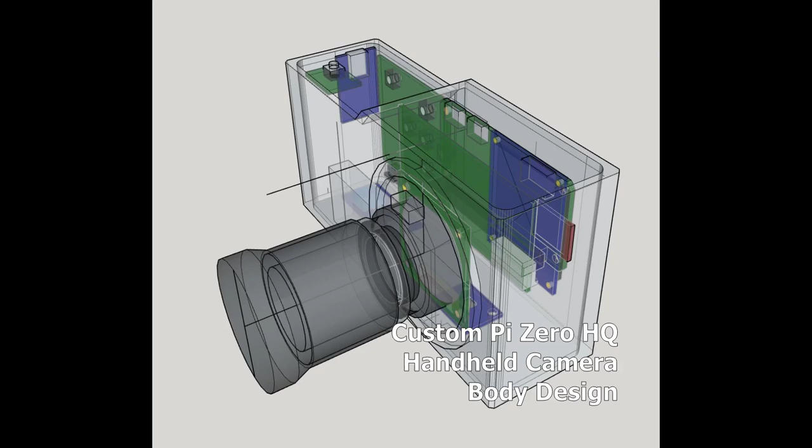Okay, so here I'm designing the body. I admit it's not anything amazing. I wanted the lens to be on the right side. Kind of a neat design.

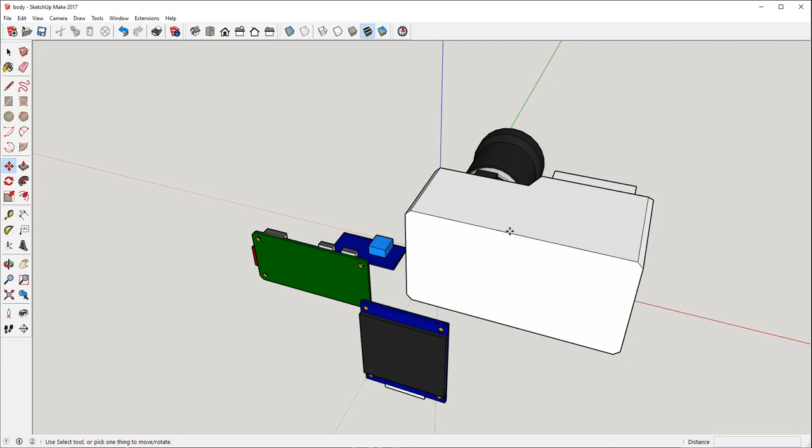The main dimensions are like spacing for the boards. This will be in there, it'll be underneath. Cut a line across here for the two halves. The battery pack is in the front here. I should group these together.

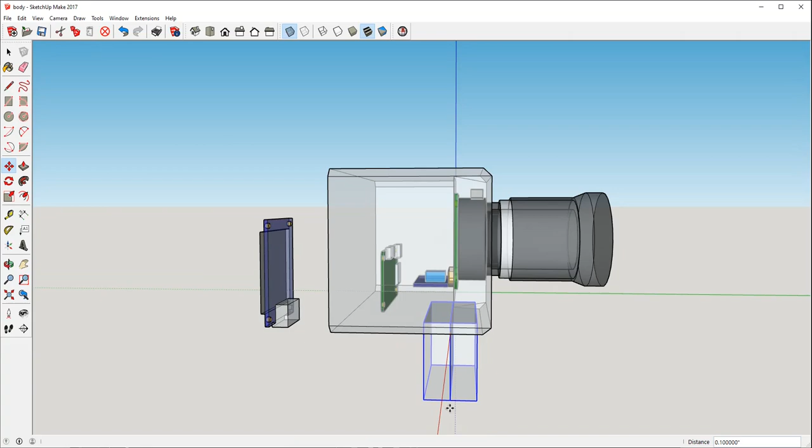The body will have a wall thickness too, so that's something to keep in mind. So something like that.

Then I gave it a lot of floor space because this guy here will be underneath. But not only that, it'll be over here because the IMU, which I don't have a model for right here, I have one somewhere from other projects, or I can make one. It'll be

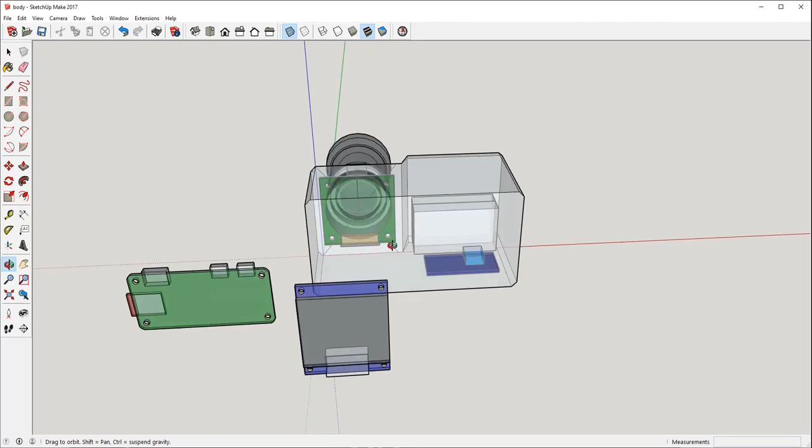mounted on the floor. Ideally it would be like in line with the camera, but there's no real need to, like it's parallel, you know. So it'll just be mounted to the ground, flat with the body.

And then the D-pad and the back button will be here, and then somewhere over here will be the shutter, which is a nasty design, but I'll probably put it near the front so it's like somewhere that you know where it is without looking.

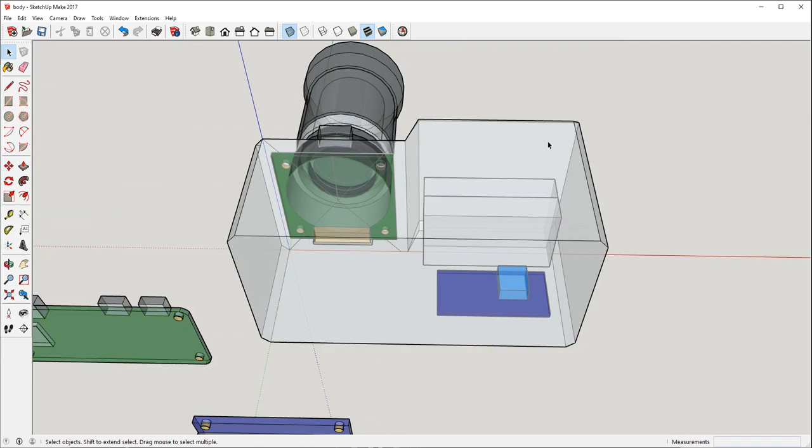And yeah, I mean, it's a pretty simple project, but it's still cool to like design and make something yourself, especially like hardware. So yeah,

I still have to wire everything together, but I'm trying to make sure I have room, and then I'll verify the components. Like the shutter with its own board, it needs like 2 screws at least to screw it upwards into the case to make sure when you push down on it, it doesn't pop out.

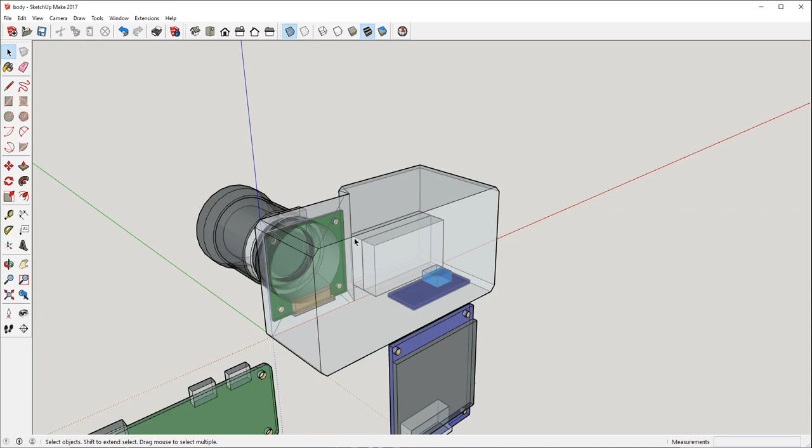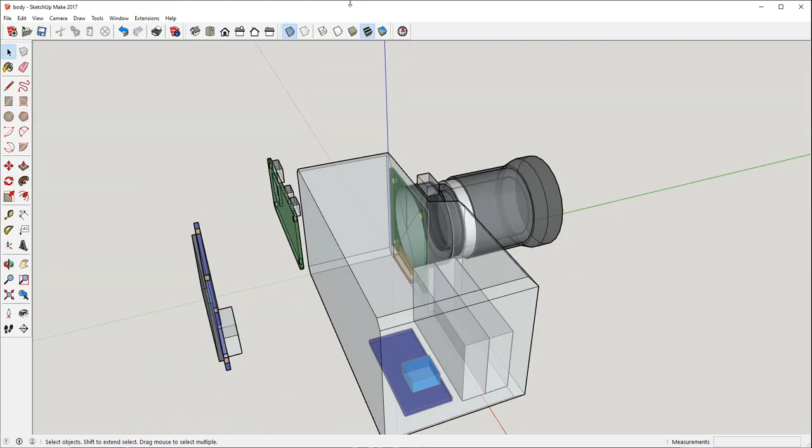Yeah, so I'll just keep going. And I did try to round out the edges, like this is still sharp. You can use some like follow me and do all the, but yeah, this'll work.

And I think your hand will wrap around this part more than the back, so the back is just flush. Maybe I should round this part at least. And then your finger, like pointer finger, will be here and thumb will be at the bottom. I think that's how you would hold this thing.

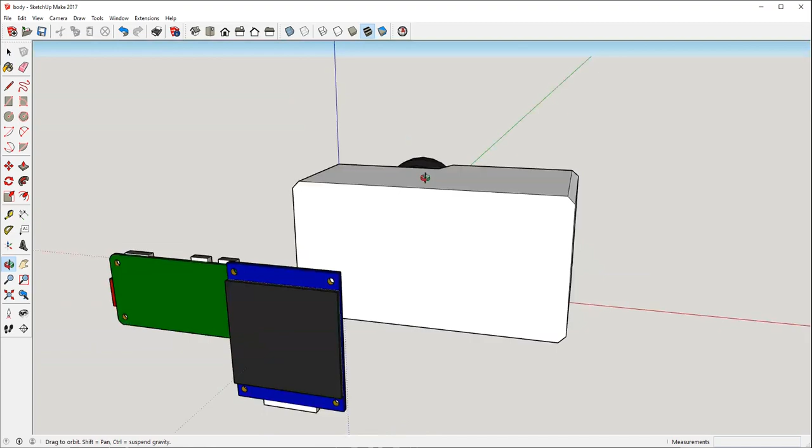And I'll just cut like vent holes so it has a way to get rid of heat. Although the holes for the ports will provide some ventilation too. It's not like it'll get really hot, but you know, it does produce heat.

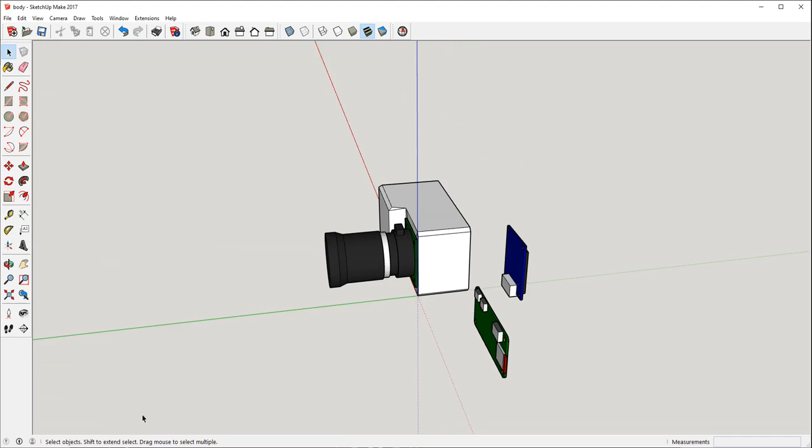Alright, so I've got everything soldered at this point. I'm just doing some designing. Previously I showed how this ring would be it would have like notches in there.

God, every time I record, man, my throat. I just drank some coffee. Alright, throat has been cleared.

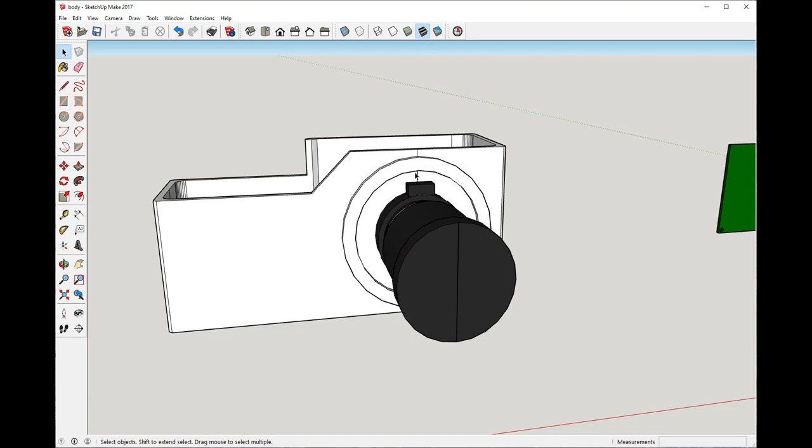Yeah, so this ring is just clearing this notch here that's in the HQ camera. It's 0.1 inch wide, no real reason, just enough room.

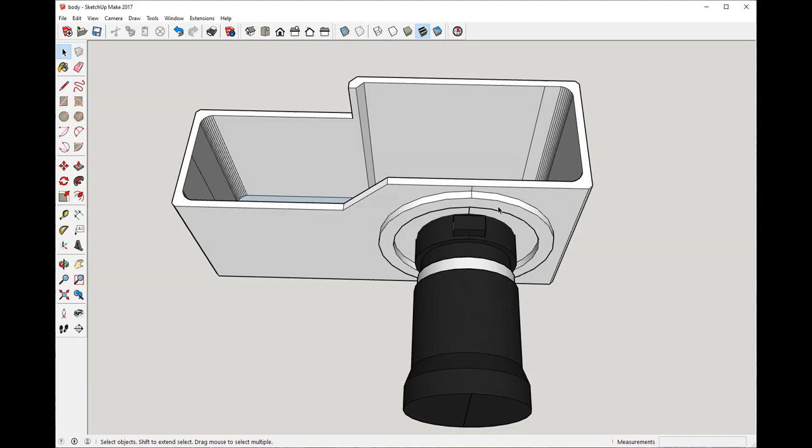And then there will be the rotating rings that are attached to each lens. Unfortunately, each lens is different, so they'll have to be designed custom. And then they will sit against that and rub against it, so it's harder to spin. And then the those screw things will be taken out, the threaded ones that are in the lens, and then it'll just use compression by the ring clamp with a screw, just like how this thing works here.

But yeah, I'm not liking this design, man. The reason I'm cutting it down is the electronics fit inside of 2-inch height, so the rest is just extra material.

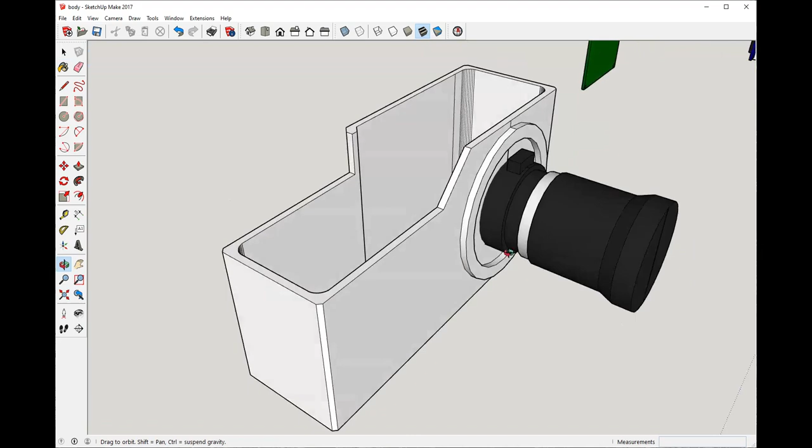But you know, it could be cool where like the emphasis on the large lens, it's like the NEX 5N, where it's like, it has like this giant lens and then a tiny body. But yeah, this cut though I think is like too much. I have to go up a little, or I don't know.

I just don't want to like commit to a design and hate it. I could always reprint it, but like it's such a pain to like get everything in there, screw it down, attach it, you know. And honestly, I probably won't use this camera that much.

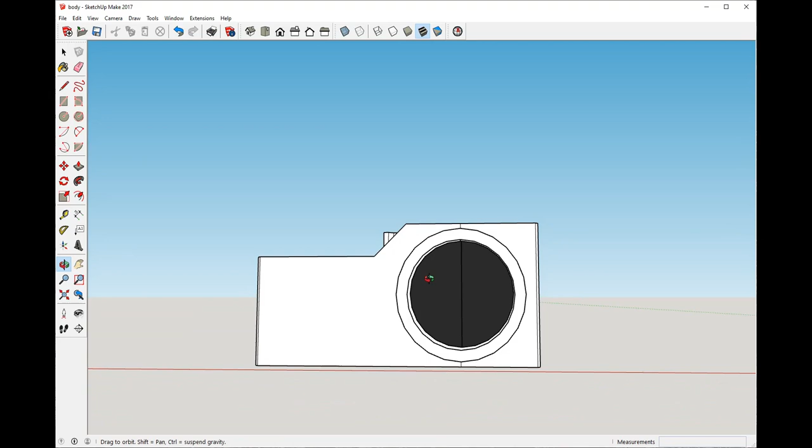Maybe I will, because I had to sell like every camera I own. I don't even have a lens for my A7 II right now. I had the kit, but it's like I always end up returning that. I've bought it twice before.

Anyway, yeah, I guess you could like round it. That could be something. Match the concentricity of this. Concentricity. There you go.

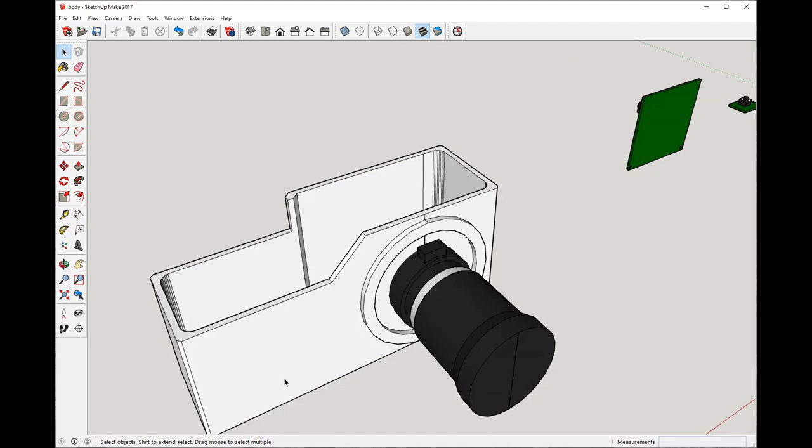But then it makes it a little harder to print, but you'll probably, yeah, if you cut it down, you'll print it like face down with the plate, which means it'll have to print supports for under here. That'll be ugly. The surface won't look good, but it's black, so it'll just blend in.

Yeah, so that's where I'm at right now, and then I gotta put everything in. It's all based on alignment pretty much. Like the left edge here, the electronics will go in there. I'll have to cut out ports so that all these things are still accessible.

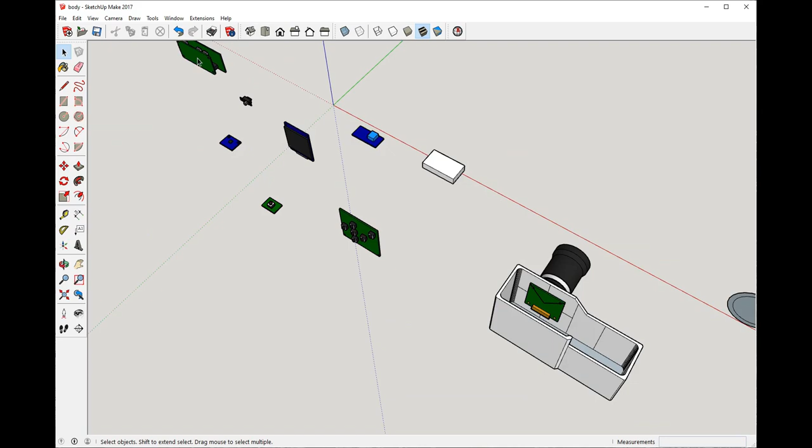And then D-pad and all that, cut holes, screw points for the OLED, vent holes, screws for the camera board, cut it in half, design like an upper, lower, inner, outer sliding thing with those channels that have the screw hole in it, so that's how it screws together.

And then yeah, I'll have a camera, and I can do programming after that. Unfortunately, I don't think I'll finish printing this today. It'll probably be sometime tomorrow. But I don't have to reprint anything, redesign.

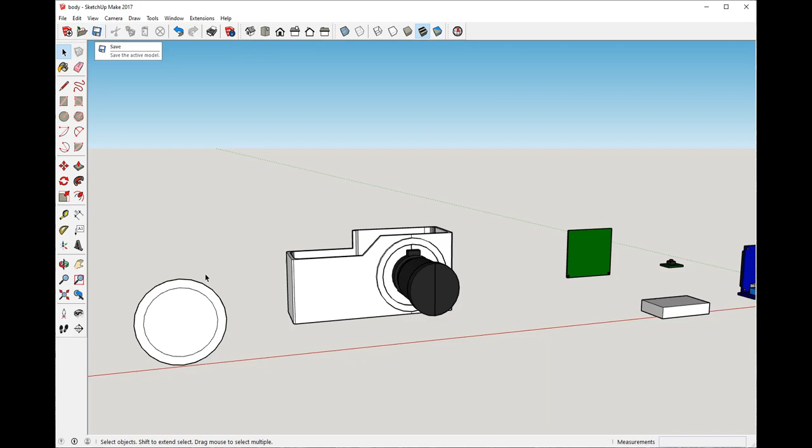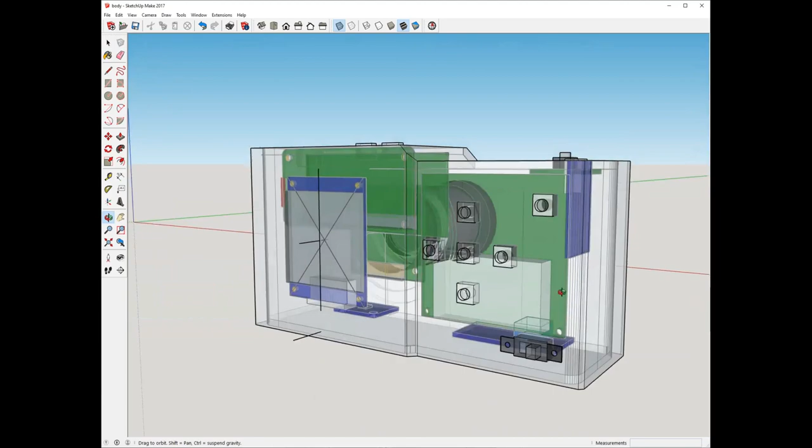Alright, so that's what we've got so far. Kind of like this X-ray looking view, but see, there's a lot of space in here. It's kind of unfortunate, but there's also a lot of wiring. This whole thing is a rat's nest of wires. But this is the layout. I still have to cut things out, cut around that, cut around those ports.

I don't know, I'll probably bring that down. That's the original, but I'll just verify how much clearance you need to be able to plug stuff into it. Same with this guy.

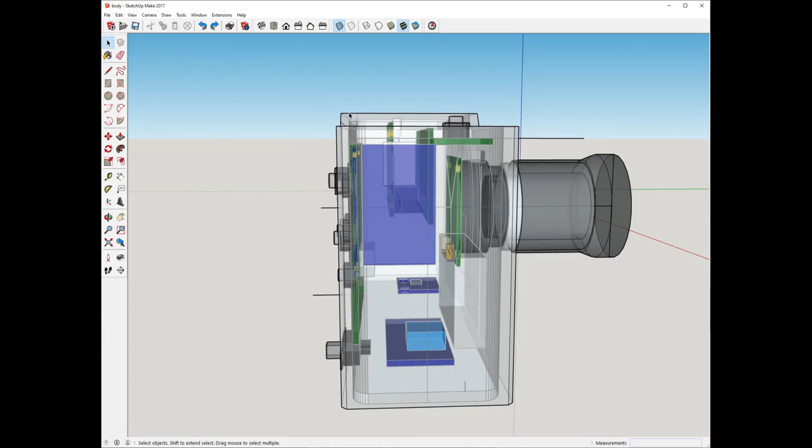But yeah, because the shell is 0.1 inch thick, I still have to find somewhere to cut it in half. What's hard is the screws, like screws on here. Everything's soldered together. That's what's hard.

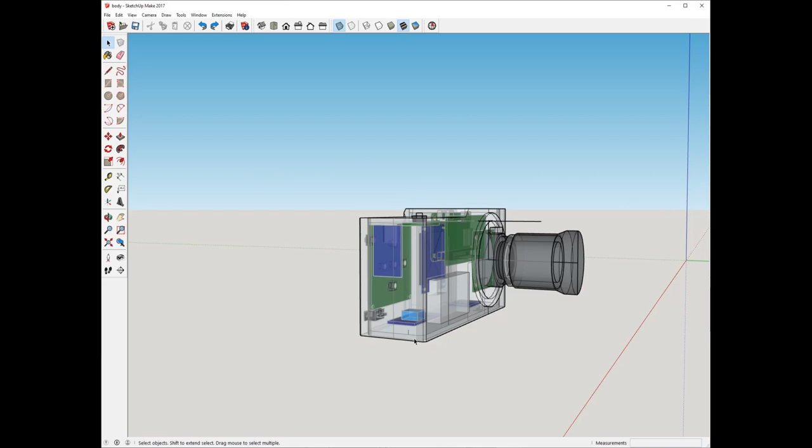So I'll have to pry this thing in half, like that way, or rotate the parts and then get into the screw holes. And then where there's no screws, I'll just use glue, which is nasty, but this is not an easy project to reproduce. It's expensive too and kind of pointless, so I'm just committed now, I'm gonna see it through.

And then the rest is like a programming challenge: make the SPI faster, the OLED, integrate the IMU and all that. There's the IMU down there. It's centrally aligned to the lens, so you got a horizon sensor.

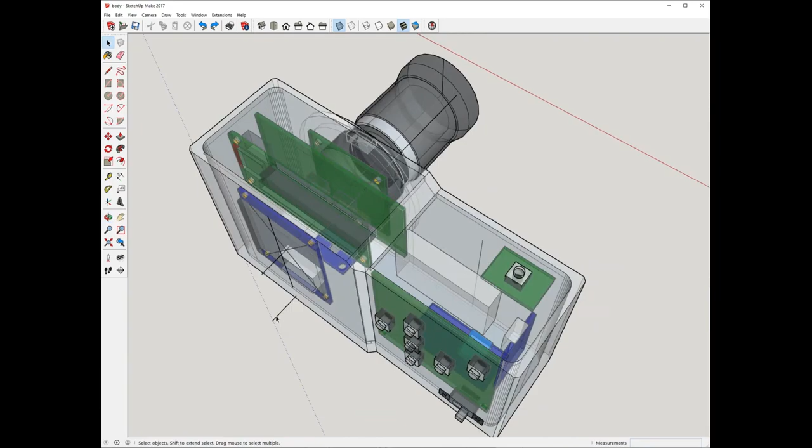DC-DC, there's your micro USB charger. It's kind of like, why is it there? But I didn't have anywhere else to put it. And then the switch, I don't know if I like this spot, but I guess it makes sense down there.

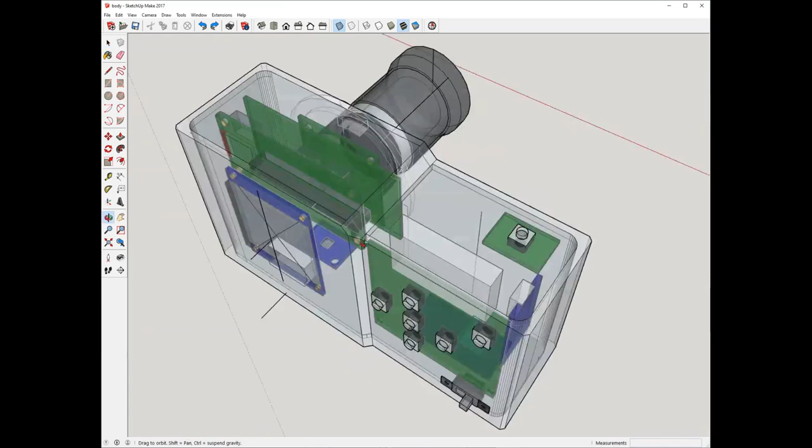Yeah, so I'm gonna keep going, and then I still have to design the lens clamps. This thing is nasty. I'd like to put a pattern in there because I don't know if it'll lock and then I can't get the focus just right. So maybe I'll just leave it as is and use compression to make it tight.

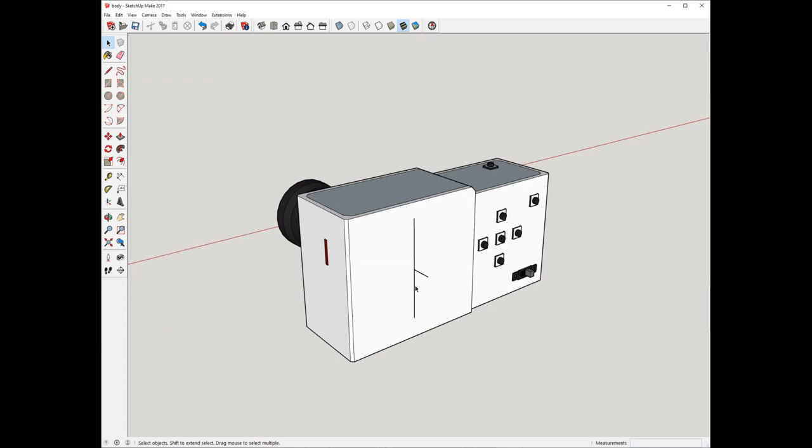At least you should have feedback with the OLED if the image is in focus. That was the whole point of having this tiny display versus an easy, giant HDMI out. So yeah, just keep going. These are just alignment guides.

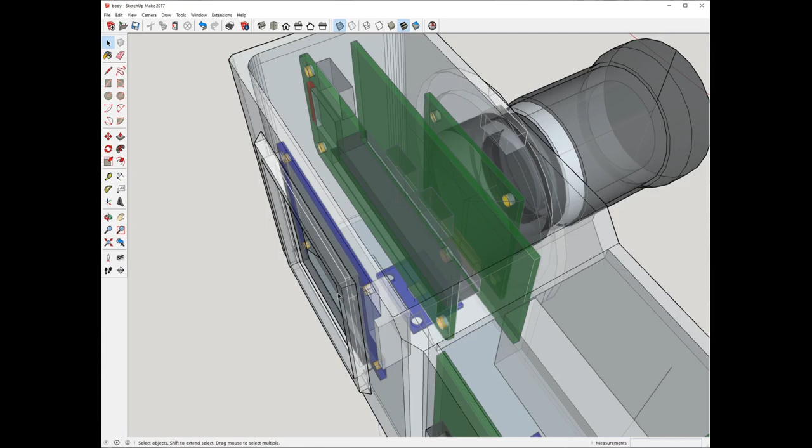So this nasty looking bevel here is because these screws have to go in 0.2 inches beyond this. It's like 0.3 inches tall, so I could have 0.2 inches of material for it to screw into. That's why it's like, ugh.

And I was trying to keep the OLED flush with the main face, but this isn't all that bad because when you're outside, like in the sun, this will block it, although it really won't do much because the OLEDs are just too dim outside. They're cheap, but what are you gonna do? So yeah, I guess it adds some character to it, more faces or more details.

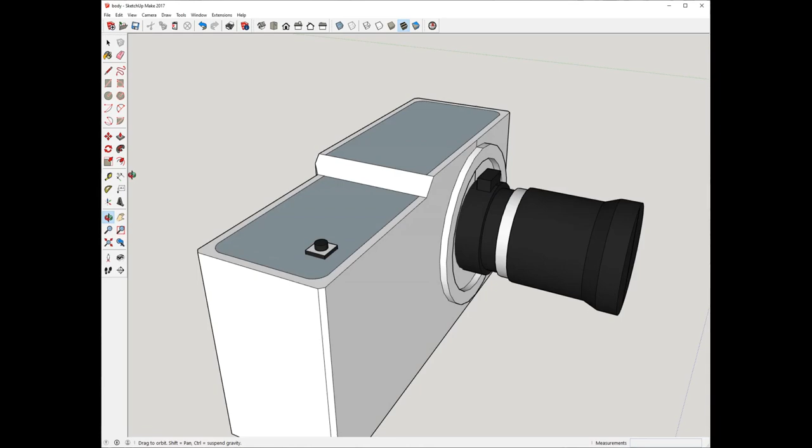And I'll probably, man, yeah, one side is gonna need supports. It sucks. And the other side you can print from, which that's sketchy too. You'll need supports there as well if you printed from this side up. So I'll have to print from this side. So this will need support. That'll need support. Oh man. Oh well.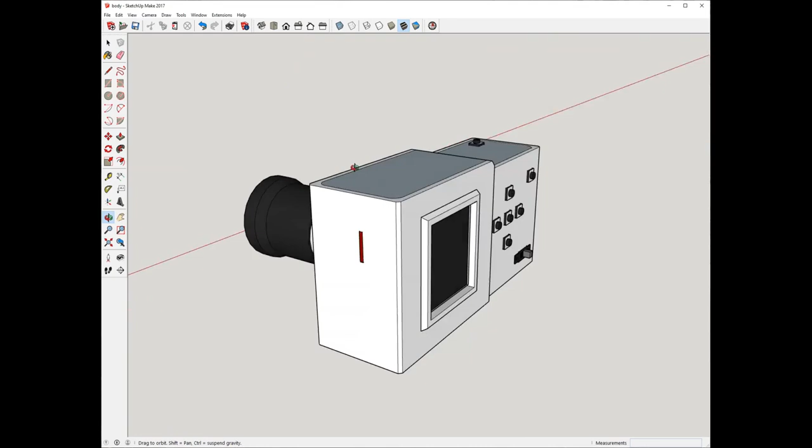Okay, so I'm at the point where I'm doing the split in half somewhere. I picked here because the back of the Raspberry Pi plate, the screws will go in that way, so I can't see my hands, but imagine me pulling this thing apart like that.

Then the OLED is free over here. I can screw into it. That one's not bad. The D-pad is coupled with the Pi Zero a lot, so that is a problem. I'll probably screw the D-pad in first along with the OLED and screw this down, and then position the, well, the other half will be there.

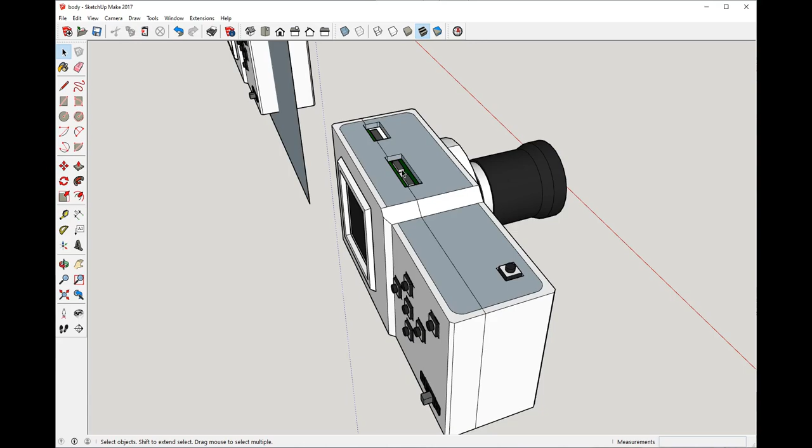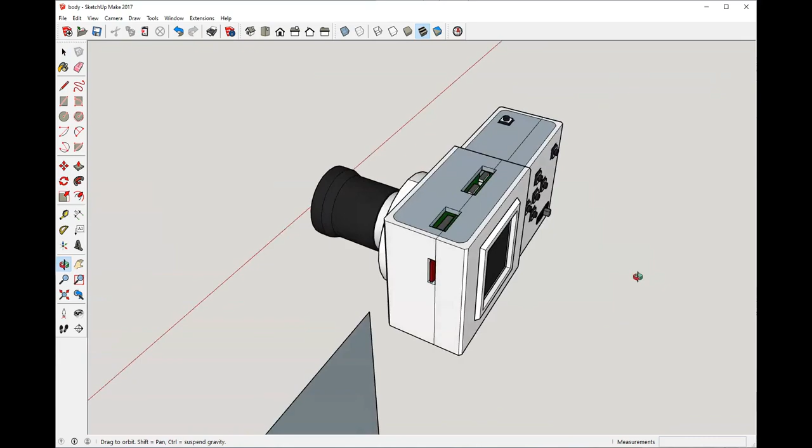I'll screw the camera into it, screw the Pi into it, and then screw this stuff, glue, whatever, and then it'll be sealed. And then in here, which I haven't designed yet, will be upper and lower layers that slide into each other. And then there will be overlapping holes where screws will go into to close it or to keep it together. I did have to extend this even farther, mostly because of the depth of the screws.

And then I also just pulled this way out so it's aligned with the base of the camera. And then lenses will just get their custom grippy thing designed against there. So in the end, you'd probably have something that looks like that, with cuts for the rotating bits.

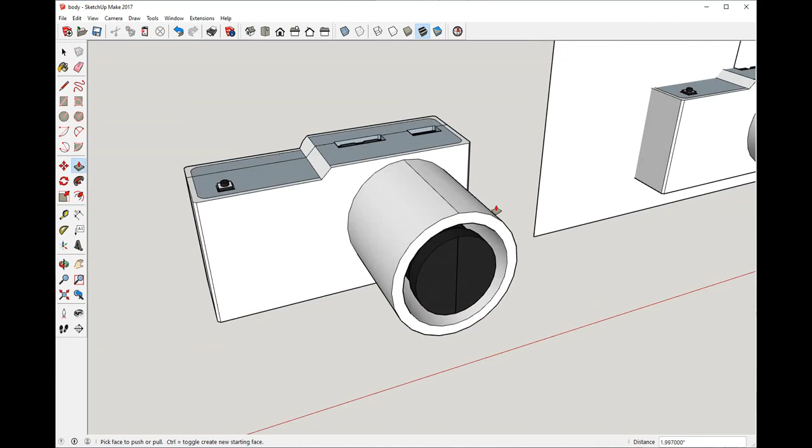It definitely looks camera-ish. Yeah, and I'll just use like a wheel, like a rim cutaway section, so it's not so much plastic. Screw to clamp them down, and then you'll have a rotatable barrel, which I will put a grip on the outside. I'm just lazy because there's probably a built-in way to do that.

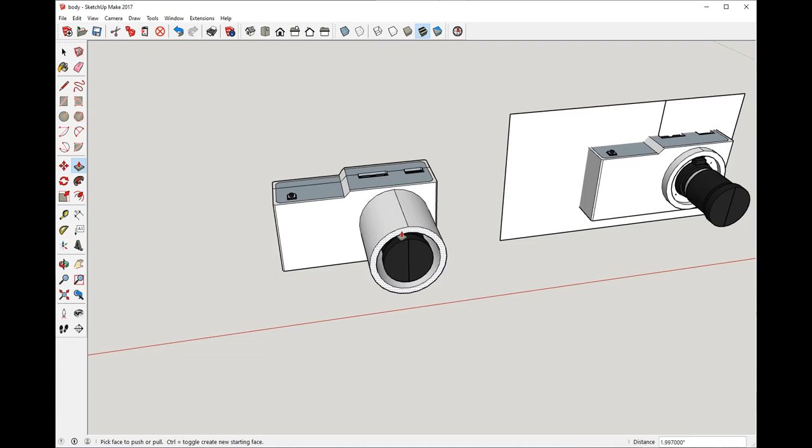I'll probably just do huge grips, like small divots, maybe 10 of them or something, versus entirely grooved.

Oh yeah, I just gotta keep going. Psycho! Alright, yeah, that was a System of a Down song.

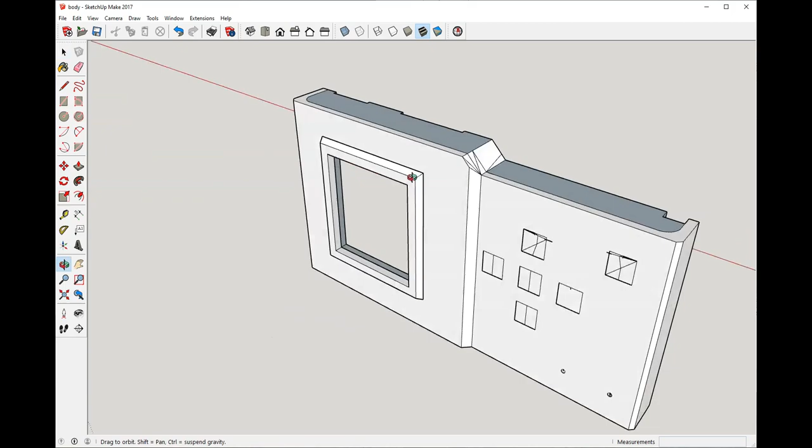So you cut it in half. I just took all the components out. Then you gotta clean it up, make sure it's all solid, 0.1 inch thick everywhere. Drill out all the holes and cut out all the stuff that I marked. Then put the parts back in and make sure it looks right.

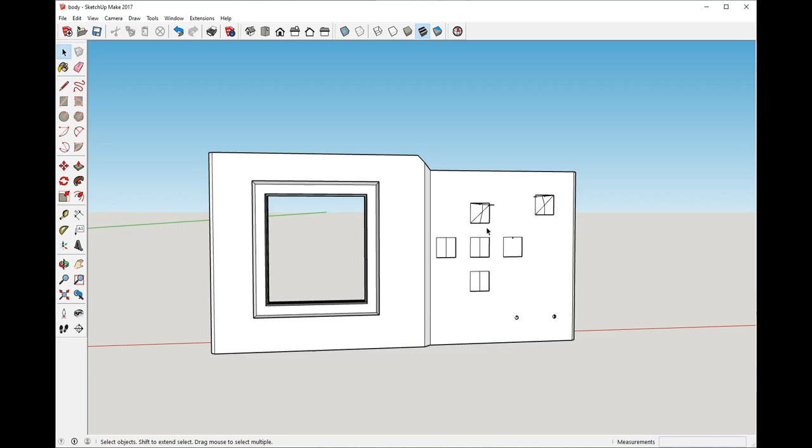Then you gotta export it as a solid, make sure it's printable. Before I get that far, I have to verify these dimensions will work, so I'll do prints of this plate here, so I gotta make sure these are very exact. If the dimensions are off, I'm gonna have to modify that and fit it. The rest should be fine. This one I just gotta make sure the camera will go through it. I added plenty of room as it comes in from the back.

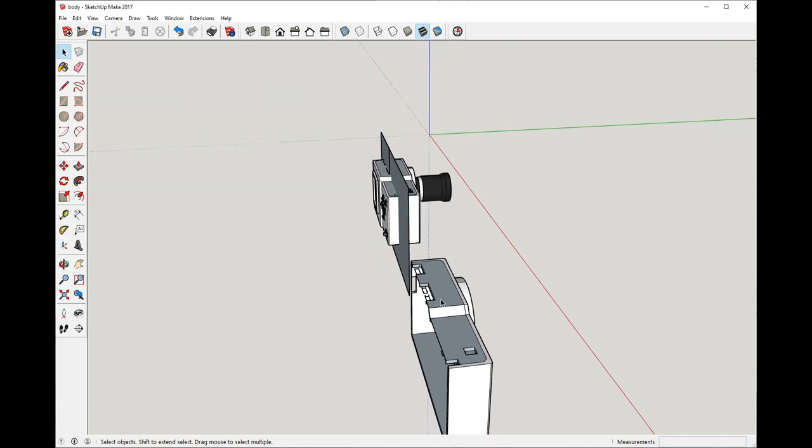So yeah, just more work. Problem with the ports is they're not flush with the surface. Well, they should be, but not all of them are. Let's see. Yeah, like here. Which I don't know why I did that. Like, why aren't they flush? The issue is the clearance of the cable, so I added these giant cutouts to make sure they'll fit still.

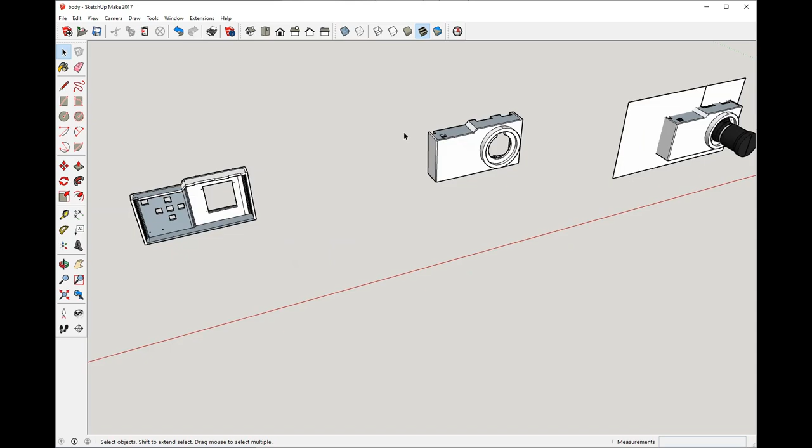I just want to show the issue that I deal with in SketchUp. So I have an i9 desktop, right? I don't have a graphics card though. That is one thing, I feel like SketchUp had a problem with multi-core processors. Granted, I'm using the free one and it's old, but isn't it amazing this thing is written in Ruby? I'm trying to imagine that. I mean, it's just a language, but yeah, to make a 3D thing.

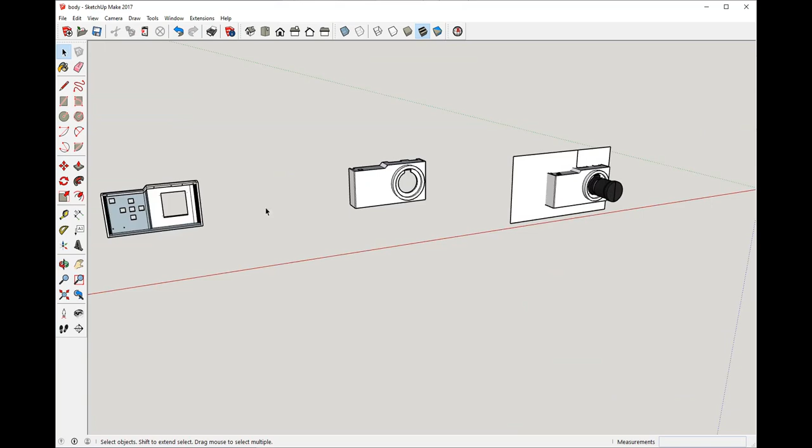Anyway, the closest I can get to is like Three.js, but yeah, this thing starts to lag. I'll do some action and it takes 3-5 seconds before it responds. Right now I'm just panning and it's alright, but there's so many problems. Like this is a simple shape, but for some reason the skin is wrong.

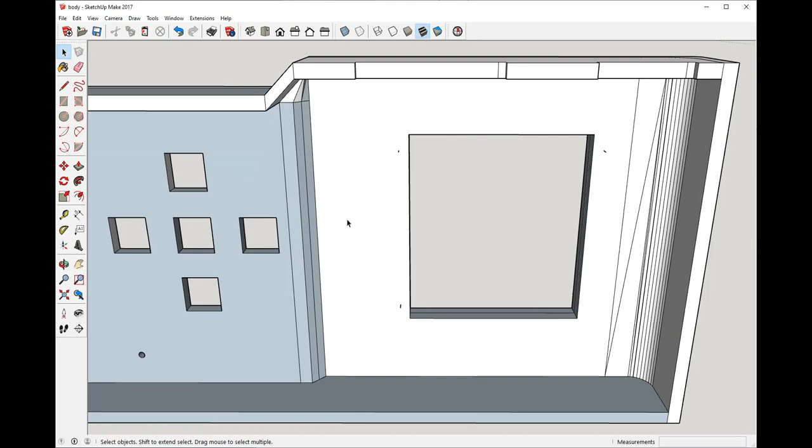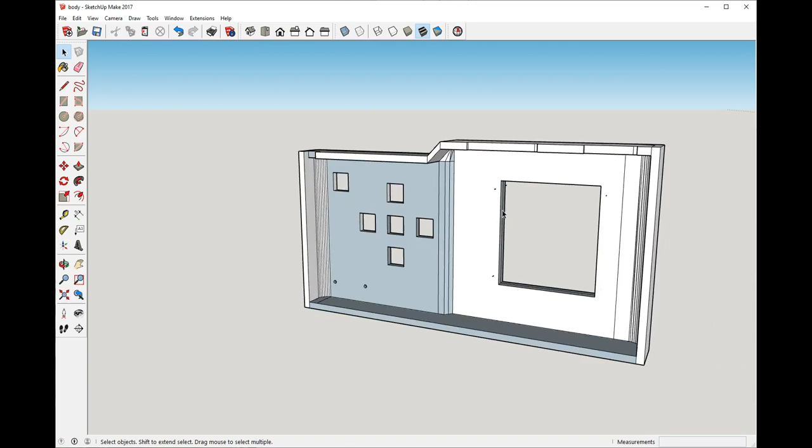Yes, right now I gotta put the holes there. I did verify that this is aligned with the original. After this hole, I'll put the two halves together and make sure it still looks like this. Put the parts into it, make sure they all fit. And then, oh, this is the IMU stand, 2 screws hold it down.

Back of the thing, I still have to verify this works. There's no holes, why? What? Where did the surface go? Oh my god.

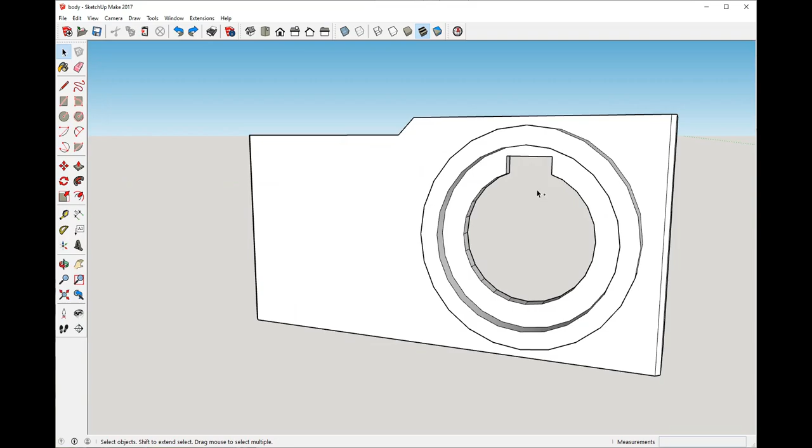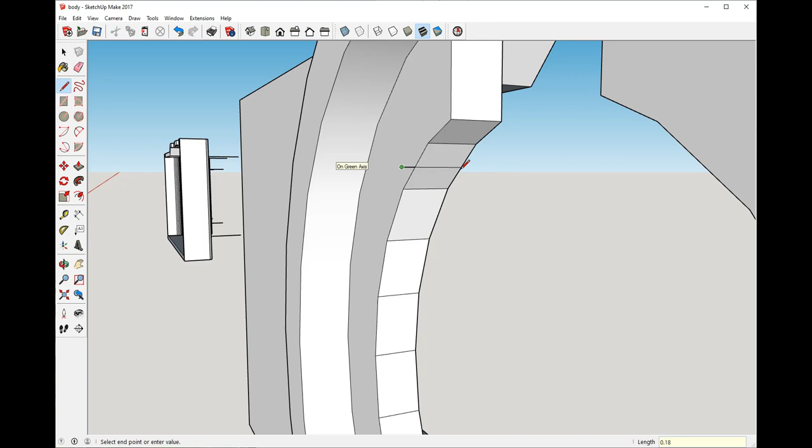Okay, so I'm gonna have to extrude those outwards. Is this deep enough? Let's see, 0... crap, it is not. Okay, that's great. Look, see, I'm zooming out, it's stuck. Panning... stuck. This is the wall, so

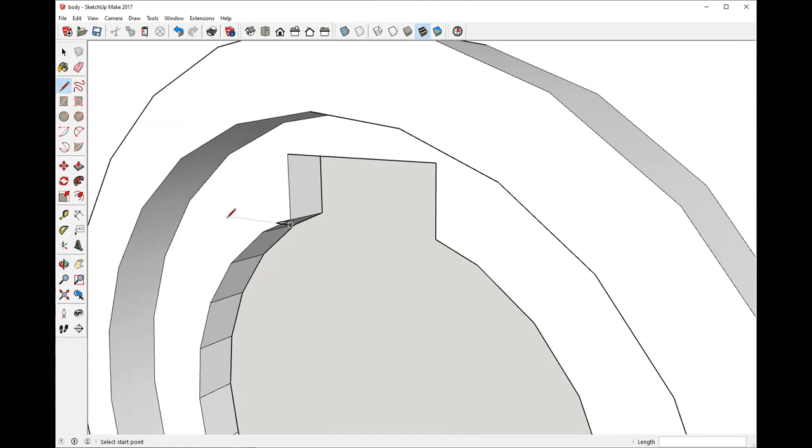I'll extrude it out 0.2. Look, come on, controls, respond. And then I can't snap to it. Come on, snap, snap. Snap, what are you doing? Gotta look at it just right. Oh my god, please, please. It's like the closer I get to the end, the slower it becomes, because there's more parts, and then SketchUp just grinds to a halt. Like, can't say... some exception, great.

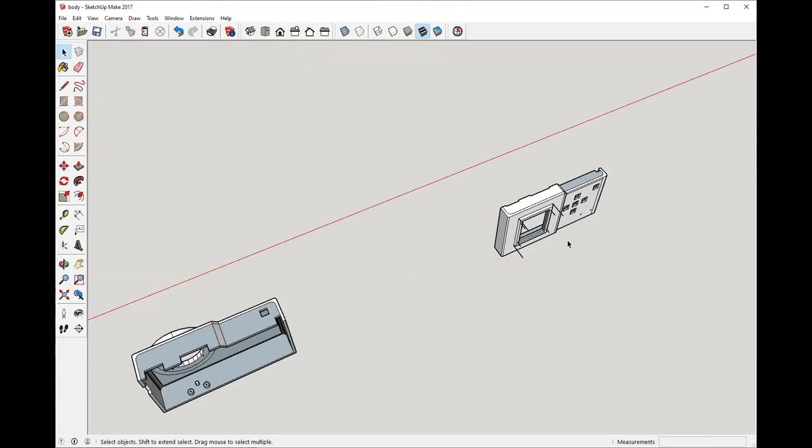So I'll have to drill those holes out. Yeah, I'm getting there. I still have to design the lens grabber things. With this, I can start firing up the 3D printer and get going. I haven't printed something in a while.

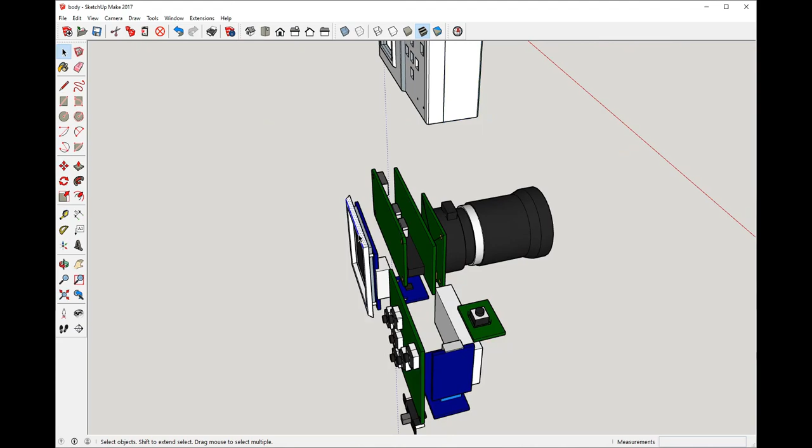This is pretty cool. I copied that and cut the skin off. So here's all the parts in 3D space as they would be inside the body. That's your battery, DC-DC boost converter, battery charger, 10-axis IMU. I upgraded that, why not, man? There's the OLED, actually I can take that out. Pi Zero. This is the proto board that has everything wired to it.

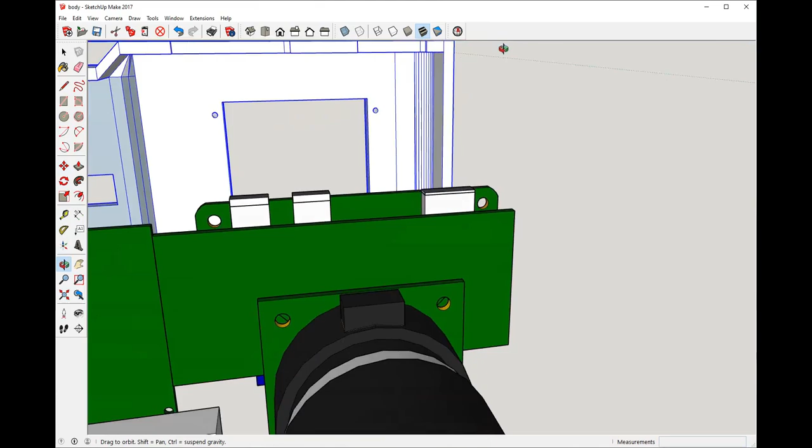So I've got the 2 case halves. Should be able to just wrap it around here. Let's see, how do I do this? I cut it against the edge of the Pi. Where'd it go? Something like that. Oh crap. And then you gotta go outwards till this is lined up with that.

Where's the SD card? Is it really perfectly cut like that? Let's see. There's the lag I was talking about. Alright, go, come on.

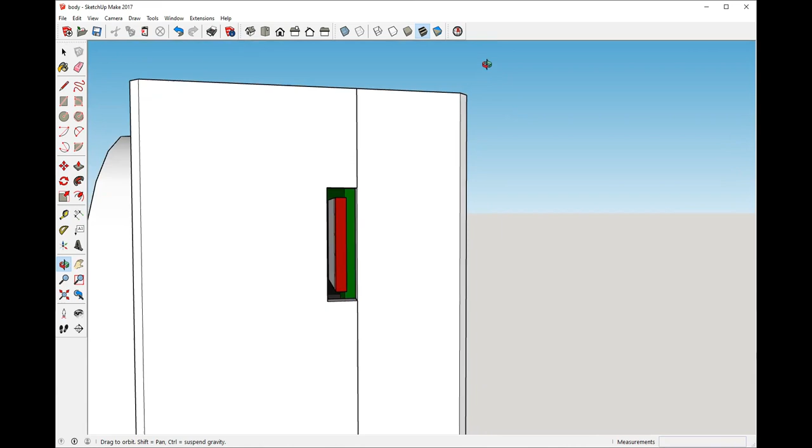Oh, that looks good. Camera is aligned with space to go through. I think that's center. Let's see, the holes line up. Yep.

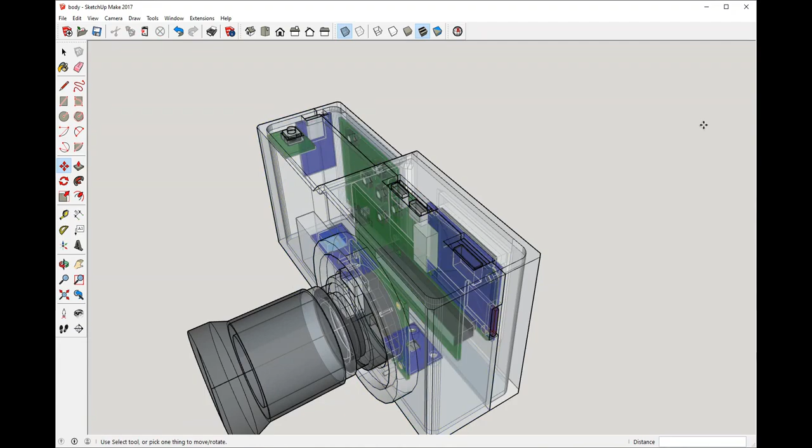This is such a cool view, the X-ray. Dang, looks good. Like the blend of colors. Alright, let's see. Yeah.

Charging port there. Button, shutter. D-pad switch, yeah. Oh! There's a freaking hole!

Oh okay, I gotta fix that. But it's looking good, it is looking good. Let's go that way, that way. Ooh, that's gonna be a good shot right there.

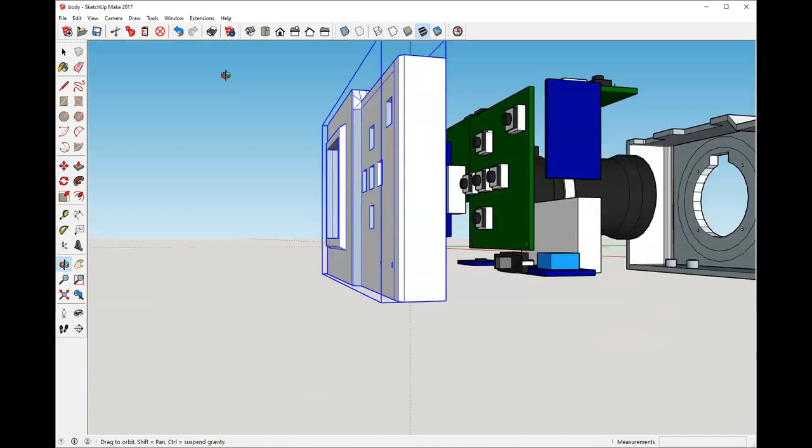Alright, it's 9 o'clock so I can't really print. This sucks, I gotta wait till tomorrow. I'll design the lens stuff, and then I'll start messing around with software in the meantime.

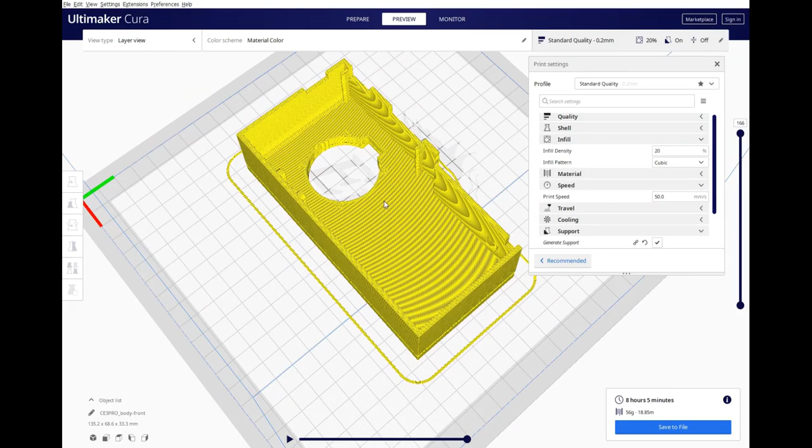So here you can see this piece takes 8 hours to print, so you have to make sure it's correct. That's half a day right there.

Dang, could save time, we didn't have the support here, but looks good though. Took me so long to clean this thing up. There's so many problems.

It does have a thickness, right? Let's see. There, that's floor. Good. Yeah.

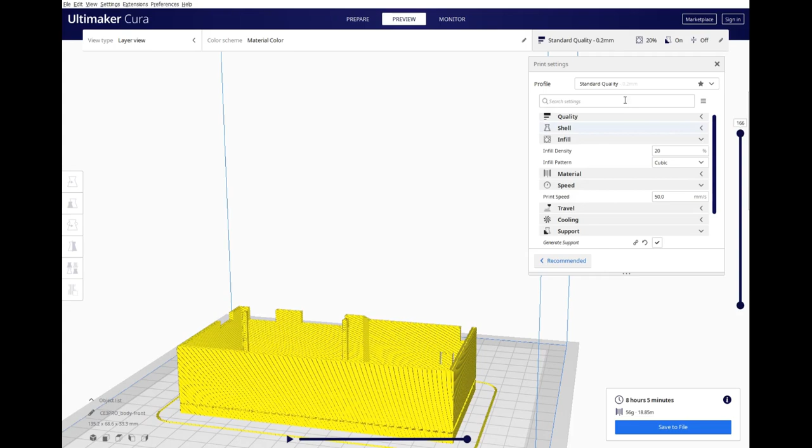Okay, so I've got the things modeled now. What I'm trying to do is figure out where to put the screws.

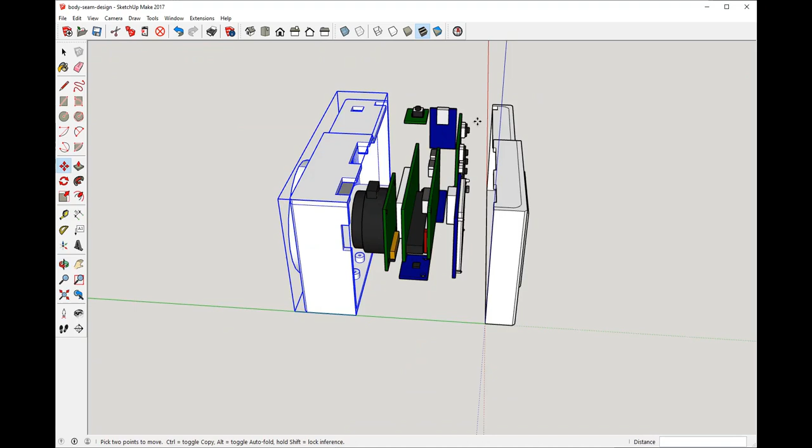Initially, I was going to have this side shorter, you know, a little bit, and then this side is shorter from the other way, and then they go together. I could, but there's so much work, man.

So what I'm thinking instead is I've got a... what do you describe it... like a black skinny rectangle thing underneath attached to this piece.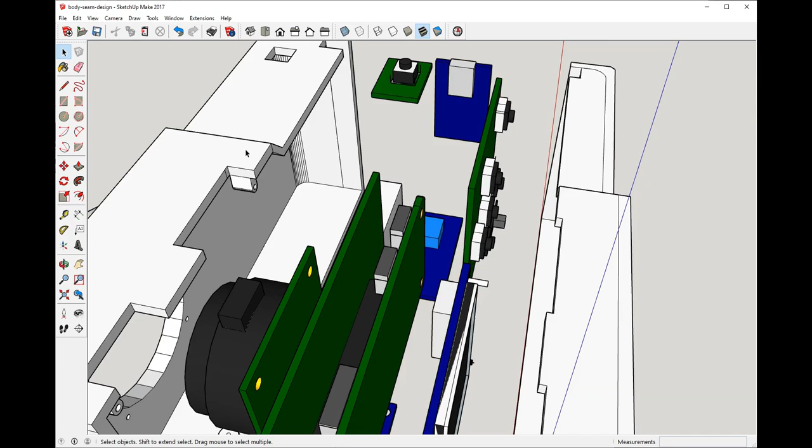This side has like a female, just like channel guides kind of thing, and then a hole for the screw. So there would be one here, one on this, one here, and then 2 in the bottom, so 5 total. I feel like that'd be pretty good.

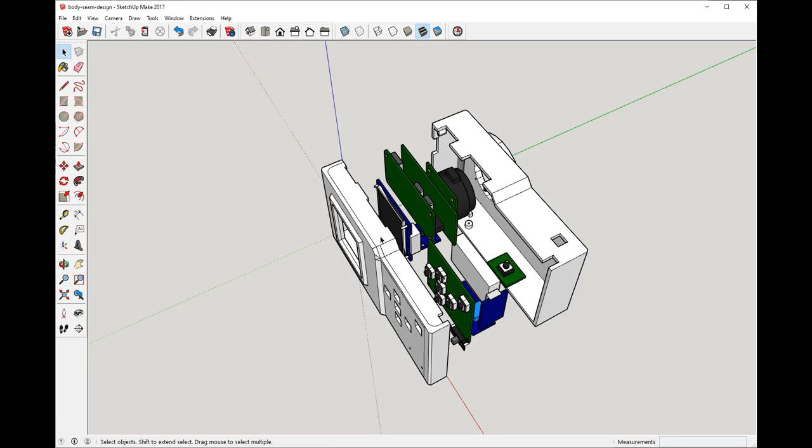What's not great is that's not a very good seal, like it's flat edge to edge. But I think the screws, like pulling them together, will be enough. I don't think anybody's gonna rebuild this, so I don't know. The OLED thing is just bad.

But yeah, I really wish I could print, but it's 11 at night now, and the printer is loud. So yeah, I'll design those things, and then I'll work on software for now.

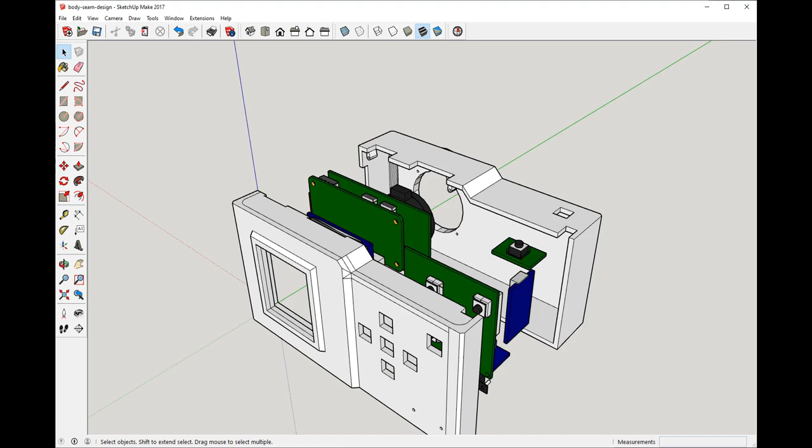I'm gonna try and see about tomorrow being the day I stay up, because then I can just print and watch TV. Alright, it wasn't that bad. To add like a lip so when they join, see.

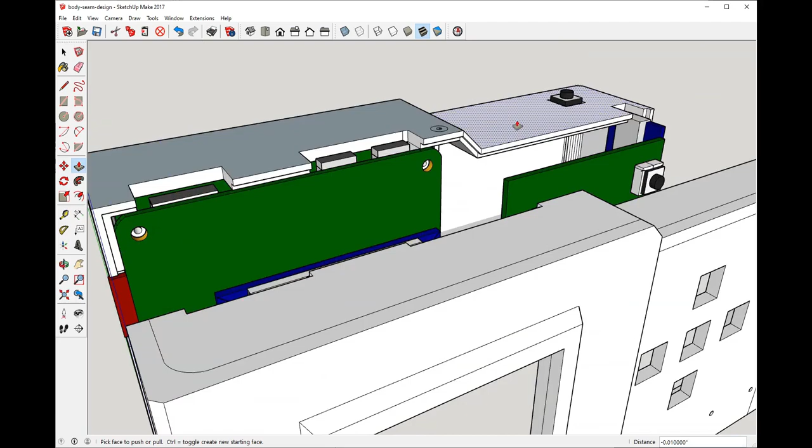I think, yeah, this tolerance though, I don't know. I put 0.01 inch, that's pretty tight, but still manageable. So those will go together, and then there are still going to be screws that actually do the holding. This will just be nice, where it feels more solid than just flat surfaces touching each other.

So yeah. Alright, so I'm just verifying that the holes are matching. These are the screw holes. Countersunk. Hole.

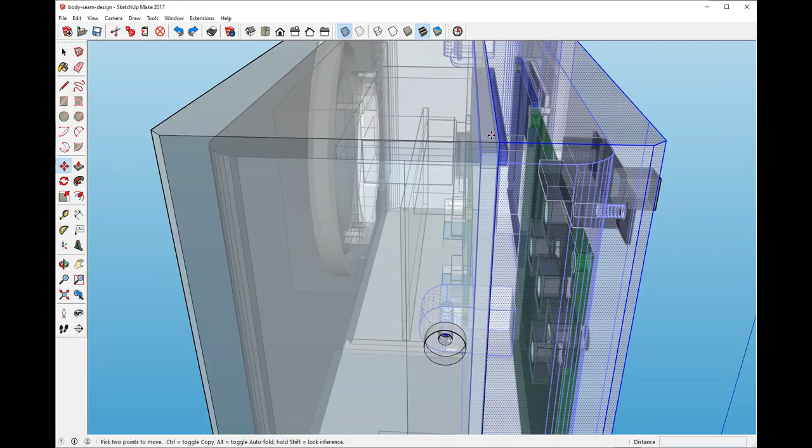I also bumped this up right here because it doesn't have to be just a thin piece here, because there's a hole. So yeah.

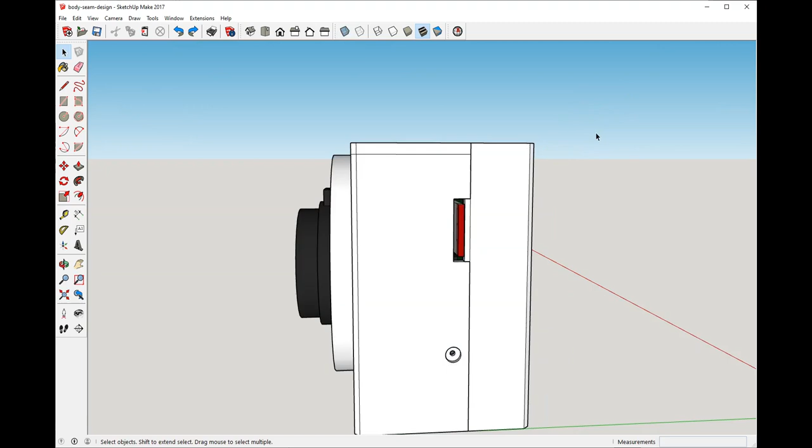And so when you pull it apart, 3 clicks. Looks like that. See how the thing will slide over this, good fit, and screw goes into that.

And that will be snug. But I still have to verify all the outer dimensions match. Deep head can slot right in there.

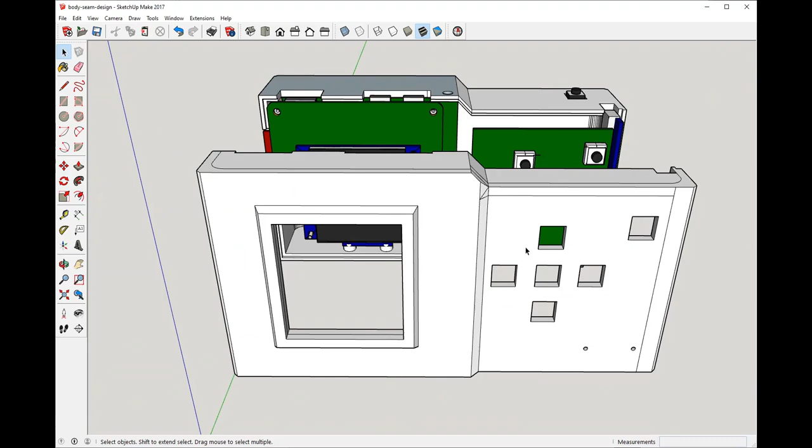But those I can just do small section prints, verify that the distances are right, screws will work, and then I'll do the final prints. This is an 8-hour print, that one's 5 hours.

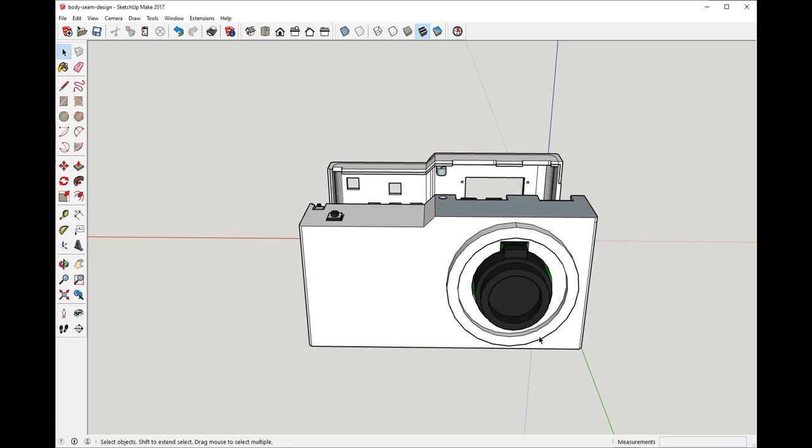Yeah, it looks like a camera. Oh yeah, and I didn't put a texture on here. I just figured the lens itself can have the texture because it'll be dynamic or easier to modify than this entire body. This is so cool. Like, you know, here it is. And then this thing will be made out of plastic.

These things are really chunky. But the issue is the screws are so deep. They're 0.3 and this is 0.1. I don't know, this is conservative.

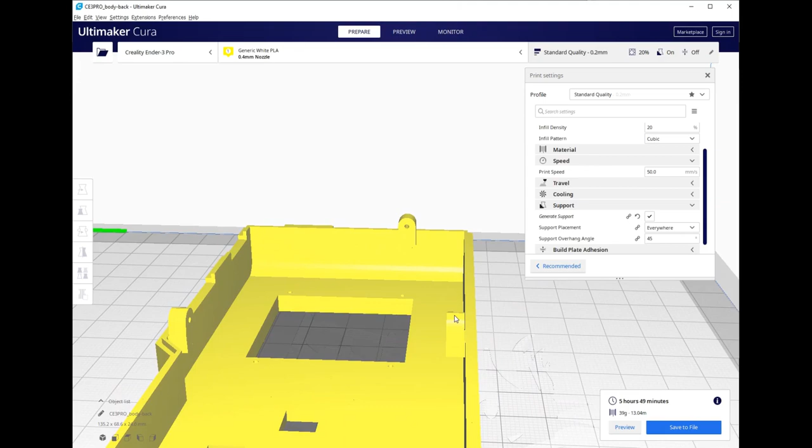It could be even longer than this. I cut it at 0.15. And it'll be good, I guess. And visually you think, oh, that could be thinner. But the scale of this stuff is too small. So yeah, I just know from working with these screws how deep they have to be.

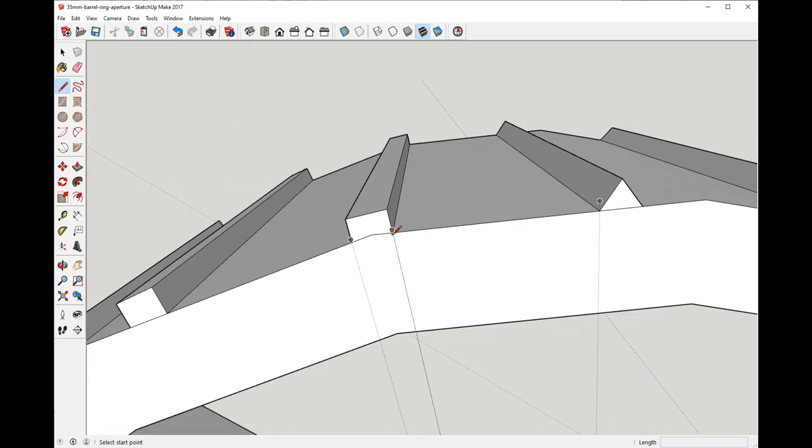These are the barrel rings. Well, this is one. I'm just laughing at myself, what I'm doing. I'm manually making these. Why?

It just looks like a rover wheel or something, which looks bad. It doesn't look like a barrel lens. So I'm going in here and making them into little teeth.

I don't know, I'm pretty tired. I could just, you know, I already rotated them. Start with one, I made 4, rotate them, duplicate, rotate, rotate, rotate. It's like a slow way to do it.

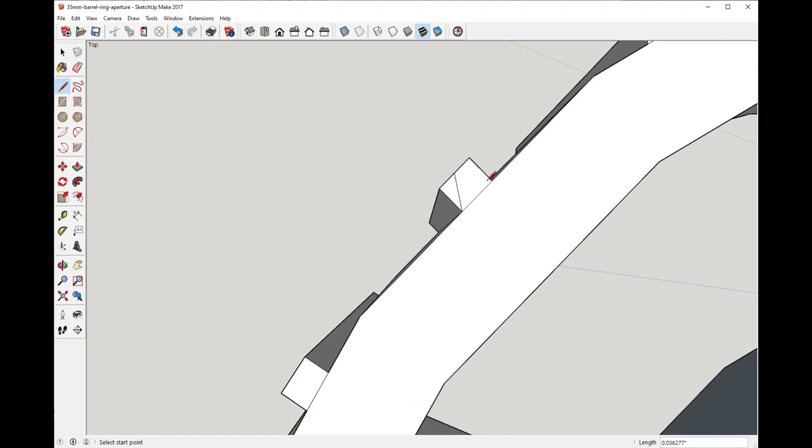Anyway, do this, print it. I gotta design the front one. You can see this is what grips onto the rotating part of the wheel. And the screw goes through.

Well, this is a screwdriver hole, but the screw is here and it bites into these two things and pinches the wheel around it. And your hand rotates this.